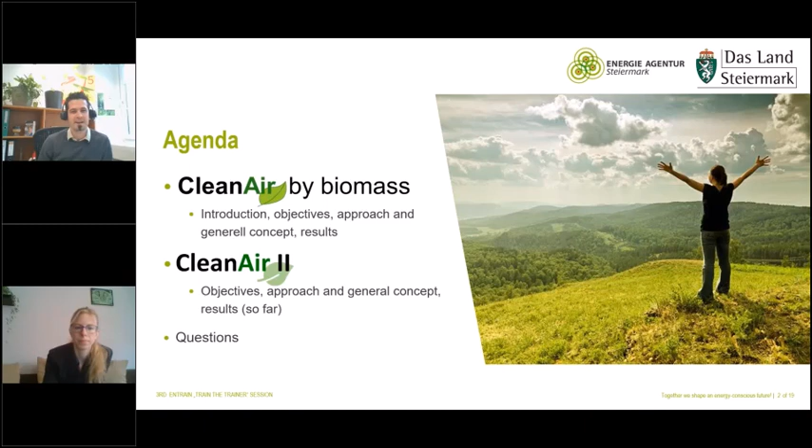Clean Air started 2016 till 2019, and Clean Air 2 is the follow-up project and started 2019 and is going on till September 2021. And I would like to give you a short overview, introduction, and the main results, what we are doing to get a better air, a cleaner air in our region of Styria.

For the introduction, very short, wood heating systems in Austria are very common, and it's always important to get the real life emissions, not the emissions on the testing of the combustion systems or the heating systems, but what is in real life, so that you can have a measurement outside. And this, you have the factors in real life, so real life emissions.

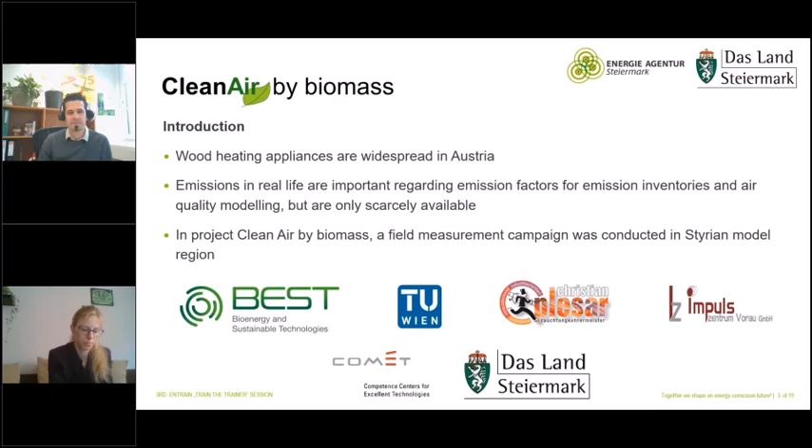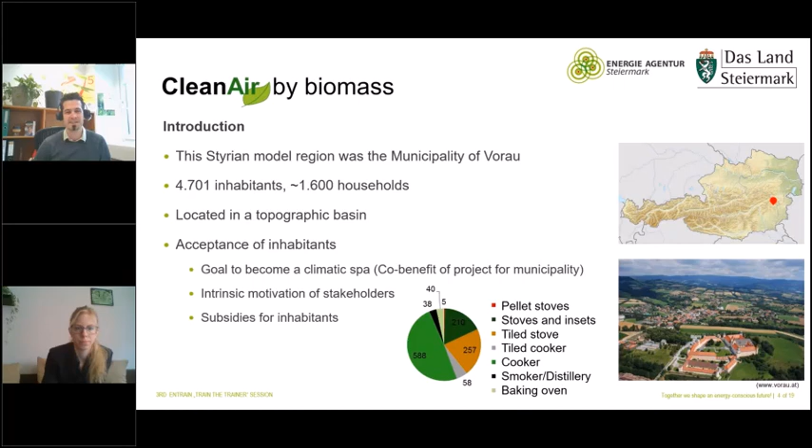And if you start the project together with the people, you have to have the acceptance of the inhabitants, and this was very good there, because the municipality wanted to become a climatic spa municipality. The stakeholders within this municipality have a very high intrinsic motivation. And for sure, we have to give the people living there also a motivation. And this was done financially by subsidies, but more on that later.

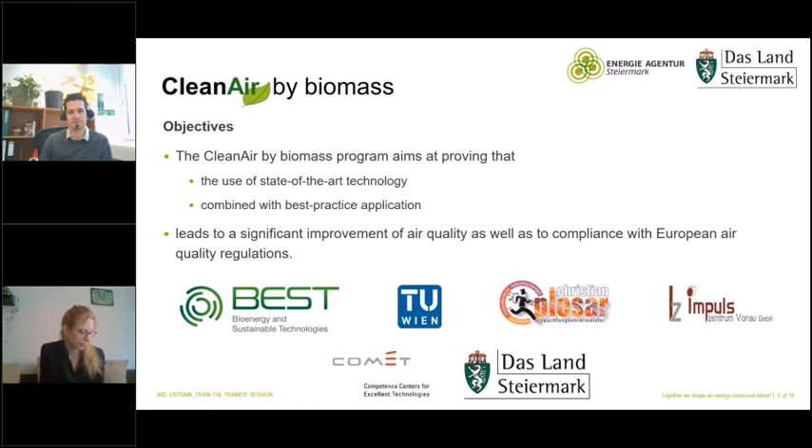Within this project, we tried to use state-of-the-art technologies combined with best practice applications, so that we can show that these two factors have a significant improvement of the air quality. And we wanted to do this with different measures, and our approach was to get from the left side, where there are lots of emissions and less clean air, to the right side, where we have less emissions and more clean air.

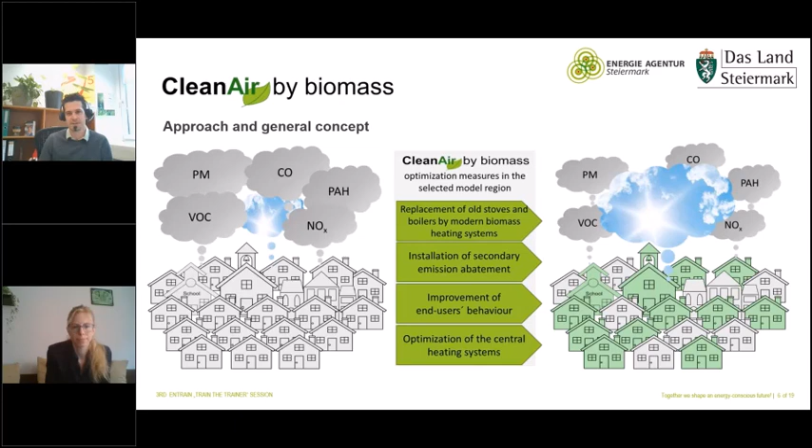And our measures were replacement of old stoves and boilers by modern biomass heating systems, the installation of secondary emission abatement, improvement of end users' behavior, and the optimization of central heating systems. And how was this done? We had an overview of the emission monitoring.

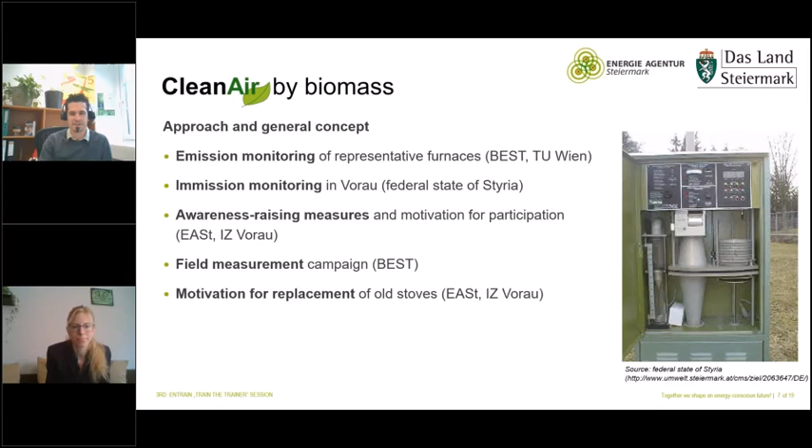We did awareness raising measures and motivations for participation, a field measurement campaign, and the motivation for the replacement of old stoves. And the last three points I would take a closer look at, because this was also our part within this project. So the awareness raising was very important, because you have to inform the people there.

We elaborated lots of information materials. We used local, regional, online media. We used multiplicators in this region, and we did workshops to get the people there and inform them how they can do a better heating with the hand-fired heating systems, and what consequences for the environment it has if you do it not the right way.

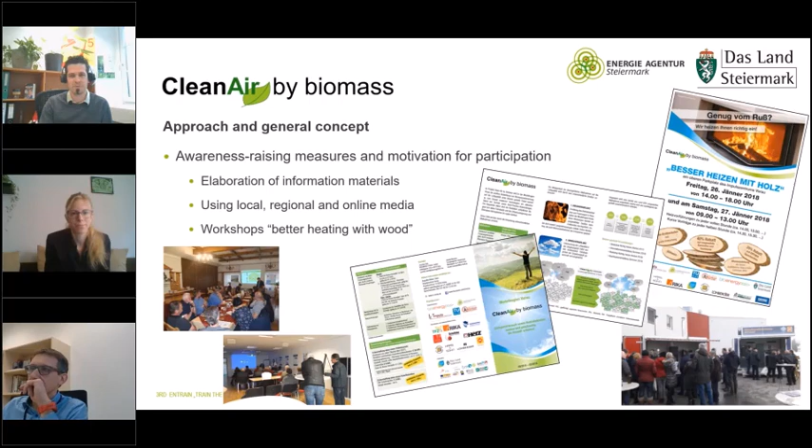And furthermore, we were looking to motivate the people by financial benefits. So if they buy a new boiler from some manufacturers who take part in this project, they get a 2,000 euro subsidy. The state of Styria also gave up to 7,500 euro subsidy. For people living in Vorau, we had savings by purchasing small-scale firewood room heaters, free maintenance service of heating systems, and free energy consulting.

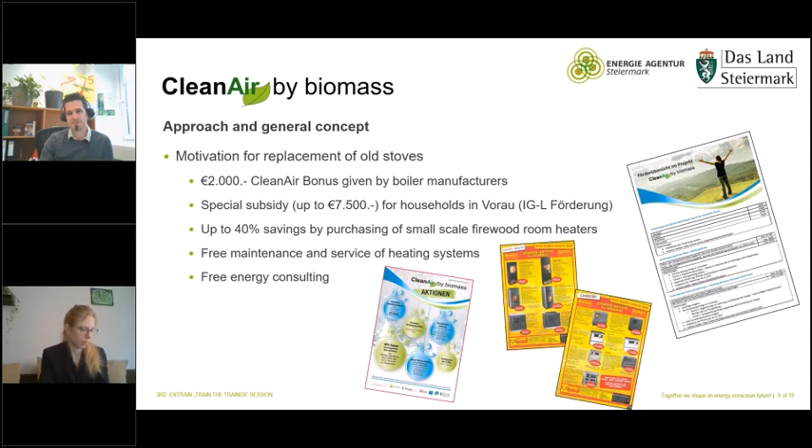And we talked to the people and we motivated the people, because one approach was this field measurement campaign. And why do we motivate the people? Because they have to have this scientific equipment standing in their living room or in their kitchen for two days. And why did we do this? We wanted to show what kind of emission fractions the people have if they heat like they heat every day.

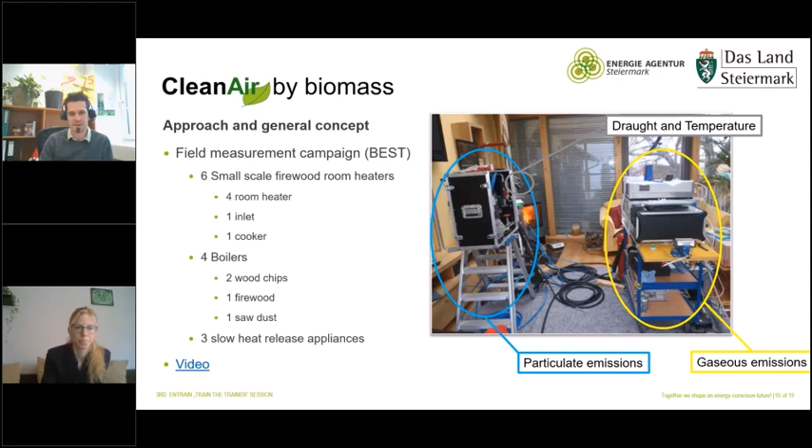And what is the change if we just give them a little advice or a little teaching on how they can do the heating better, and look at the systems, how can we optimize the system? And the main result of this project was, on the one hand, that the replacement of old stoves has a high potential for pollutant reduction.

Service and maintenance is always important, and modern heating systems, automatic biomass heating systems, have very little potential for reduction of pollutants. That was relatively clear, but the key result was the user. And this was really interesting for us, because if you tell the people how to start the heating process, that the fire is not starting bottom up more or less, but you have to start the fire on the top of your wood, then you can reduce the emissions.

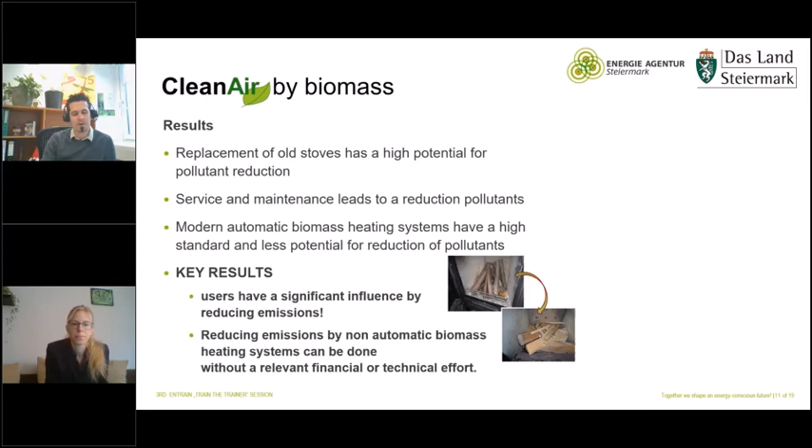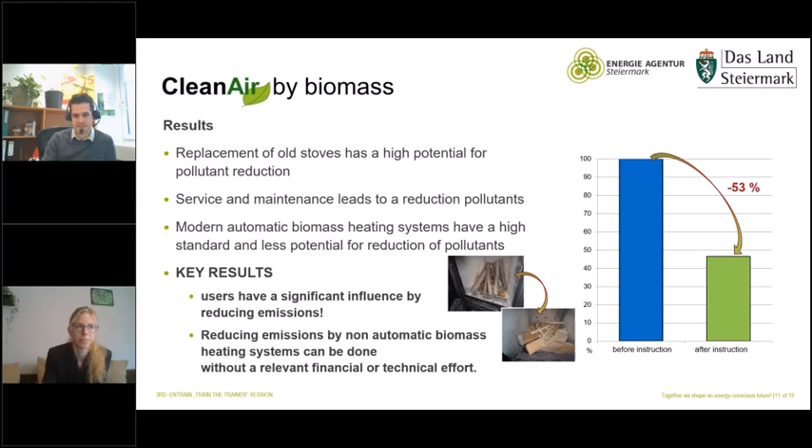And over all measures we've done so far, and over all pollutants and emission factors, you can reduce the emissions by over 50%, only by giving a training and instruction to the person who is heating the stove. And this was really interesting, and this was also the basis for CleanAir II, the follow-up project, because we see that the end user's behavior has a really significant and relevant influence on the air quality and also on the emissions itself.